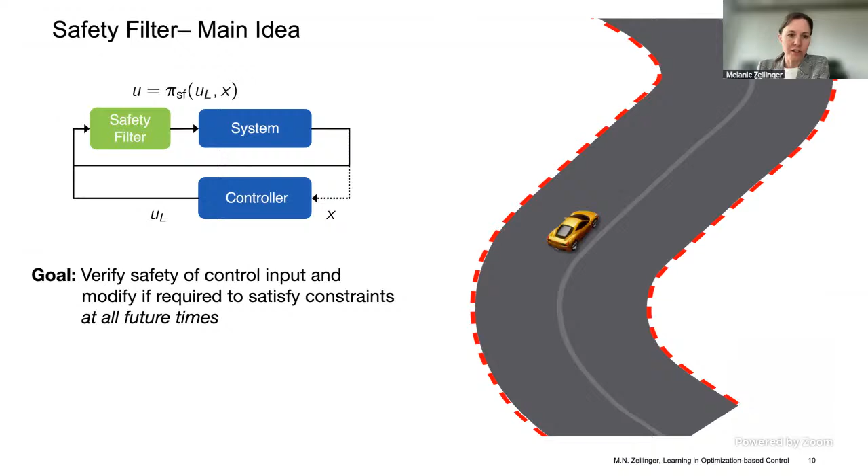We can now think about that problem building on the tools of control invariance. And this has been done, I think, mainly in 3 directions. Thinking about control invariance and computing these via reachability analysis, control barrier functions have become extremely popular. But also, now that we have seen this idea of safety as a planning problem, you can also write down a predictive safety filter. There's many more that I'm not listing here: techniques relating to reference governors, and different terms than safety filters like runtime assurance, etc. So I'm just highlighting those 3 as main categories that we've in particular thought about.

And we've tried to put them in perspective in this recent Control Systems Magazine article. And we've also given a tutorial at the L4DC last year that you can find online if you want to hear a little bit more about safety filters.

So if we now write down a predictive safety filter, we can directly take these constraints that we had before, which ensure safety from some current state. But now we're going to add our safety filter objective and say, well, we want to plan a safe trajectory, but we also ideally want to match the proposed action. And this is the same objective that we also commonly use in control barrier functions. So if I apply the optimal U0 from that problem, then I know this is always safe.

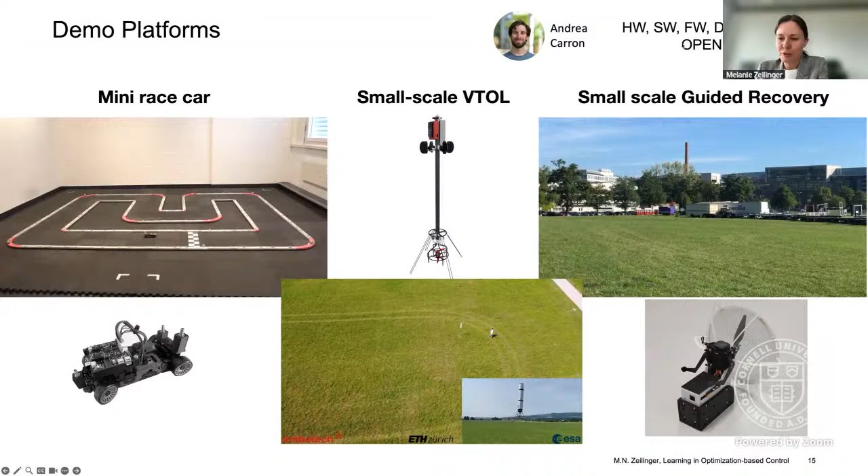We have, maybe I'll play this again, a small scale guided recovery system. So you can control the parachute to do some high precision landing. And so it's really nice to test the algorithms really early on these platforms. They're all developed by Andrea Carron in the team, and we're making everything open source. So hopefully many people can build on these systems or replicate them and build on also the software that we have been developing already.

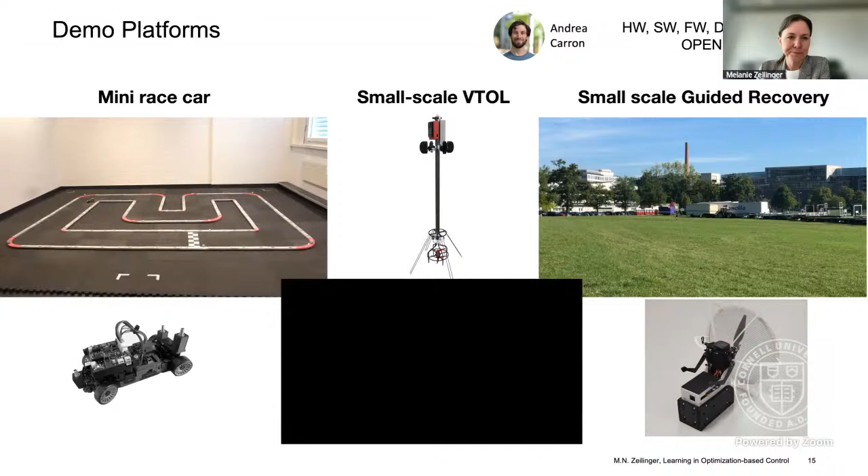And then we impose the state and input constraints on the prediction, and we use a terminal condition in the cost and in the constraints. And then, of course, we know that the standard formulation has really nice theoretical guarantees. So when we now combine this with learning, we actually have different options, and I just want to point this out. So we can build on the predictive control formulation and integrate learning, or we could also come from a reinforcement learning perspective and just use MPC as a particular policy parameterization. The way that I will talk about this is really where we build on MPC and integrate learning, but just to highlight that there are really different perspectives on this.

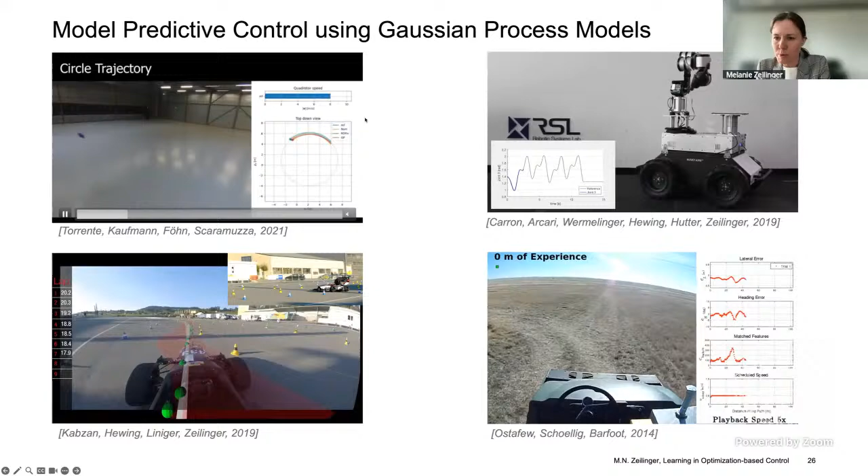Over the last years, we've seen some nice demonstrations of GP-MPC that motivate us to take this further. Of course, some older work on autonomous racing that we have done, and also some nice results on drone racing from Davide Scaramuzza's group, where we really see performance improvements, and we can account for the uncertainties, so we're nicely getting uncertainty-aware high-performance control.

So what we want to do is we want to integrate such a GP model and the predictive control formulation in order to leverage the improved prediction capabilities of such a model. But we also want to account for the uncertainty. So this makes this a stochastic problem. If I put in such a GP, I can formulate my constraints as chance constraints, also modify the cost correspondingly. But of course, this is not yet a tractable problem.

There's many challenges. One is just the uncertainty propagation going forward over the horizon, because I have to now propagate the GP through the nonlinear dynamics. Then, of course, I have to think about constraint satisfaction guarantees if I now do this in receding horizon and in closed loop. And then I have to think about the computational efficiency, but also the learning efficiency. And I want to address in particular the computational efficiency in the following, and then I'll also show one idea for a really highly efficient parametric approximation that we've done that allows us to learn efficiently.

Okay, so for the first approach, we're building on a very common linearization-based approach where we are rewriting the problem in mean and covariance dynamics using linearization. Then we can also approximate the expected cost, and this leads us into deterministic constraints. So this is all nice. We have a nonlinear program. We could go ahead and solve it.

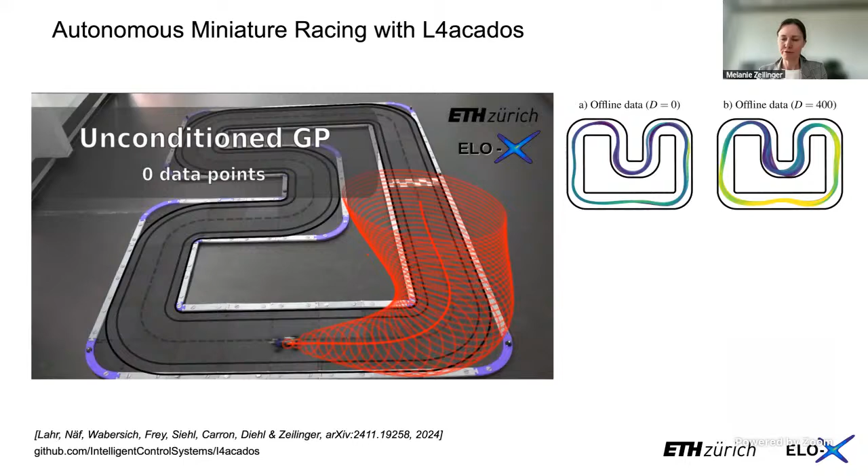Here I show this for the cars. So we have our mini cars. We have a motion capture system for the estimation, and then we're solving a model predictive contouring control problem. And what you can see here is just the GP prior, no data. We have high uncertainty, and basically we're just running very carefully along the center line to just carefully collect data.

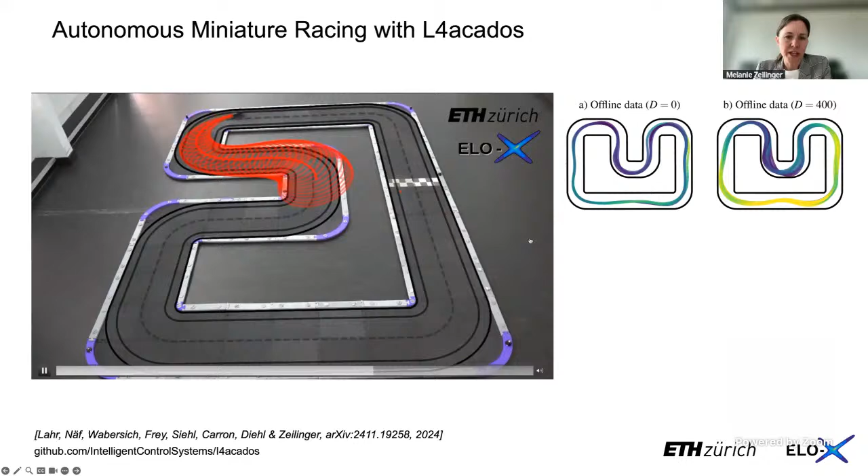Then we are taking 400 data points of those. We can run with the conditioned GP. You can see that the uncertainty is now reduced, and we're really starting to see more optimal racing behavior. Now you can also learn online. So we're now always taking 100 data points as we go along. And so over the laps you're improving and changing the performance.

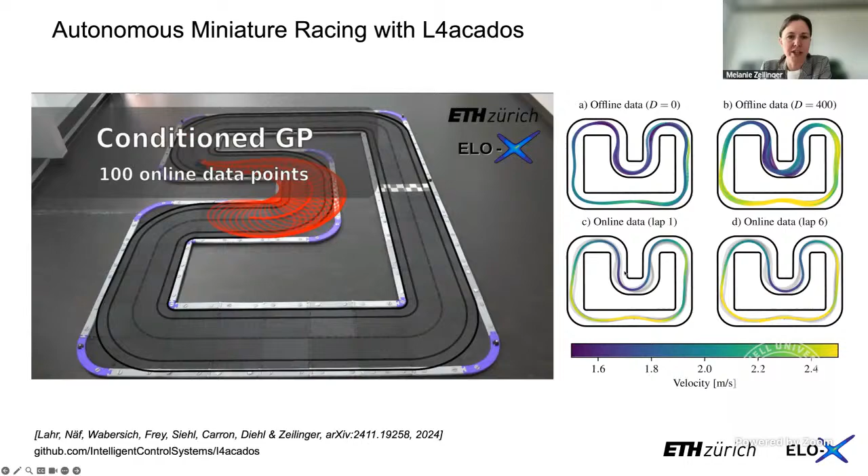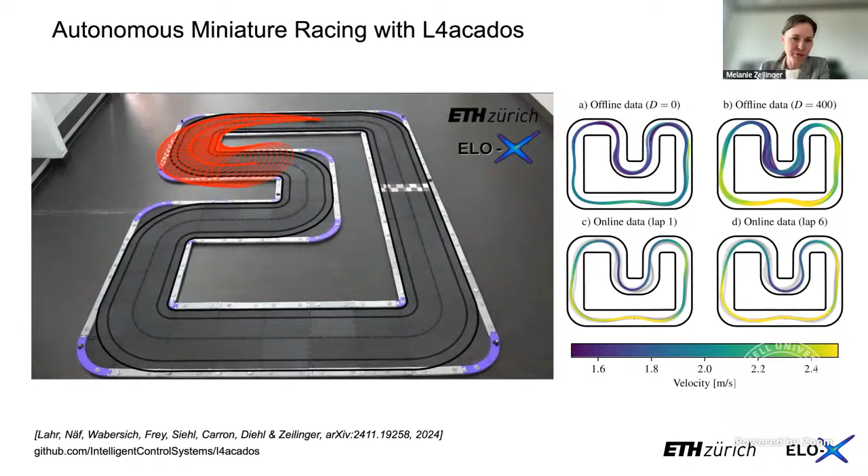Okay, so quite exciting. I think for GP MPC, we're at a point where this can be done for a complex nonlinear system in real time. So I think we've made a lot of progress on the practical side. What was nice to see is that from this result to another problem, so this is again this test vehicle at Bosch, it was really simple to do the transition.

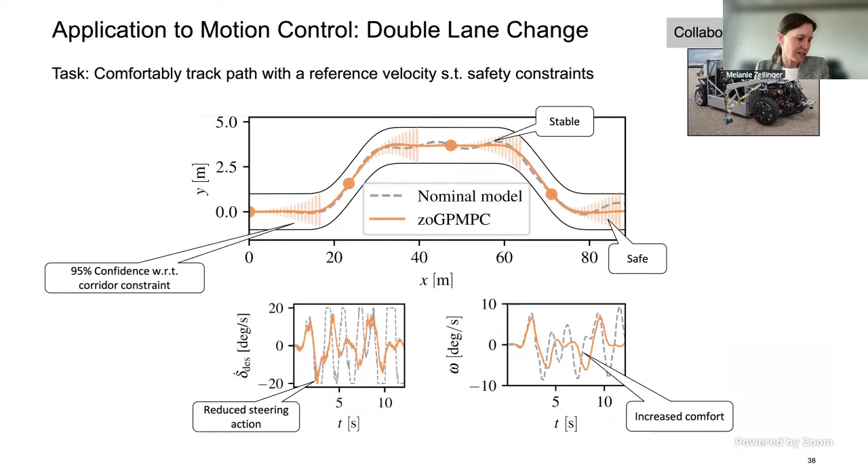So what we've done here is we wanted to show that the dynamics improvement when we do GP learning helps us improve the performance in a lane change maneuver, where previously it was seen that the poor MPC prediction actually led to uncomfortable behavior, a lot of steering action and a sort of oscillation. And with the improved GP model, it was very nice and smooth and really had increased comfort. And so it was very easy now with this toolbox and what we had developed to go into this different application. Okay, so great progress on the practical side.

But of course, I think we're not done with GP MPC. There's lots to do, and this brings me back to the trade-offs between theory, guarantees, computation, and performance. So I think we have methods on both ends. So this was what I presented. We work with the linearization, very nice practical results, efficient computation, but they can actually under-approximate the uncertainty and so be too optimistic.

So it's difficult to give rigorous guarantees for this formulation. We've seen methods on the other end where we get really nice guarantees by over-approximating the reachable sets in an ellipsoidal manner. But this is often really too conservative for practical purposes. So there's lots of room to think about better trade-offs on these different axes. And of course, lots of people are working on this.

We have recently added one more point in the middle that I'd like to point out. And this is by sampling the GP now within the sequential quadratic programming approach. What this leads to is that we get really good approximations of the reachable set forward, so much, much tighter sets. Of course, the drawback is that it's currently still rather computationally complex.

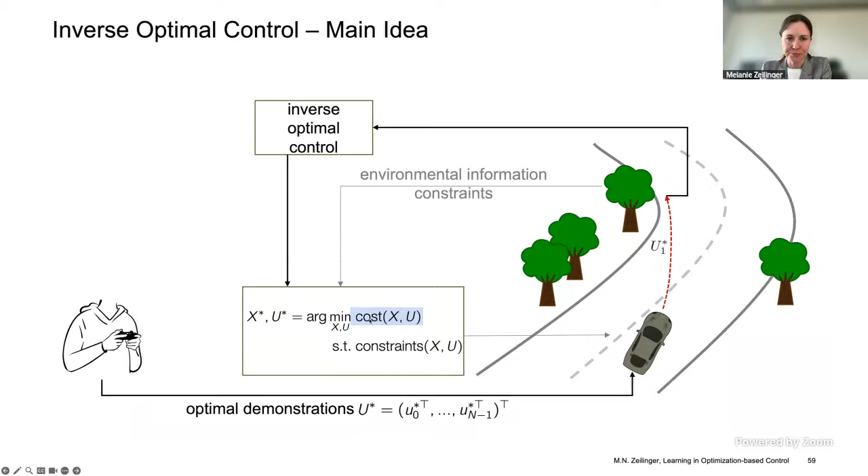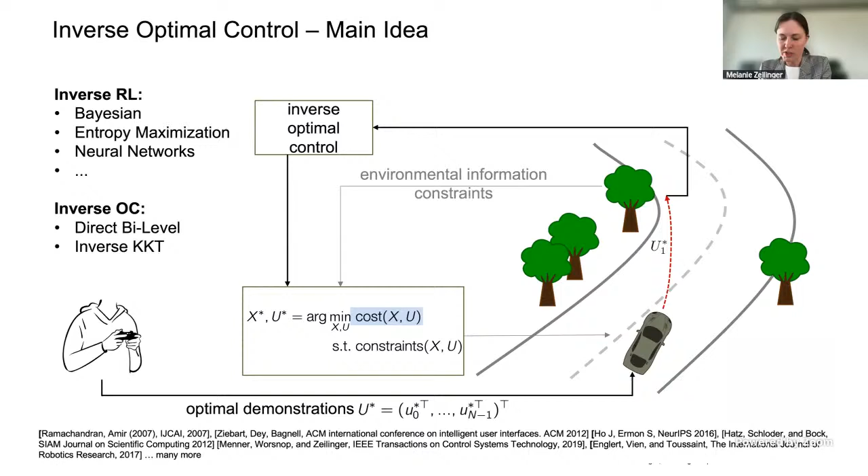Of course, inverse optimal control is not the only direction. This is also addressed in inverse RL. And both have various different methods that have been proposed. I think there's a clear difference between the two directions. Inverse RL is extremely nice because it allows us to naturally consider suboptimality, so suboptimal demonstrations, because it builds on an MDP setting. Whereas inverse optimal control is naturally suited to think about constraints.

And so when we have demonstrations that were generated in a constrained environment, that allows us to take that additional information into account. And the idea is that this leads to better estimates. While, of course, you can also approach this from the inverse RL side, what I want to show you is that we can try and approach this from the inverse optimal control side. So we want to extend the methods that we have to deal with noisy or suboptimal demonstrations.

And so for this, let me just briefly tell you how inverse optimal control works. It builds on the optimality conditions, the KKT conditions, that are necessary under suitable assumptions. So we can write down stationarity, complementary slackness, primal and dual feasibility, and we'll for now assume that my demonstrations at least are primal feasible. So this is usually satisfied.

So now I can actually solve this system of equations given an optimal demonstration x star and u star. So I can solve for the dual Lagrange multipliers. And if I propose a parametric form of my objective function that I don't know, I can also solve for theta, the parameter. So that's quite nice. But of course, if I now put in a suboptimal demonstration, any one of those optimality conditions can actually be violated.

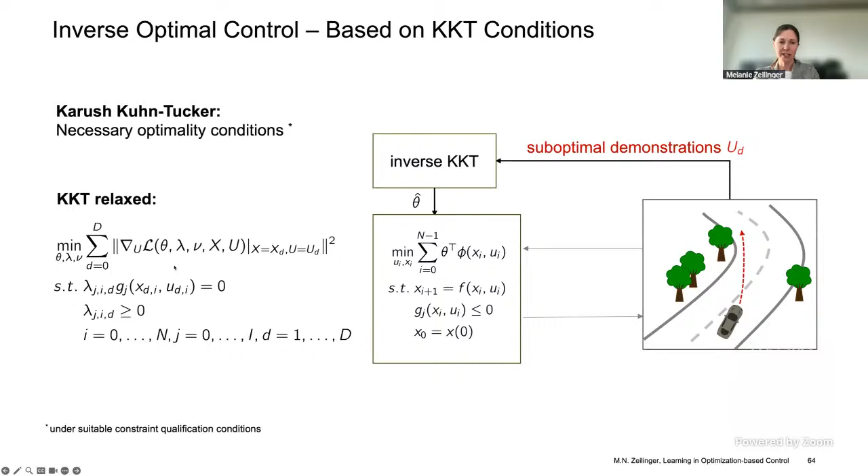The way that this had been addressed in the literature is that we relax the stationarity condition. So we keep dual feasibility and complementary slackness. We assume primal feasibility is given, and then we relax the stationarity condition and take the least squares approximation. However, this is actually an inconsistent estimator if we have a noisy demonstration.

Let's say if I have a noisy demonstration, there exists an optimal demonstration plus some noise, then this can be seen by rewriting our stationarity condition as a regression problem. So here we have a Jacobian, which will be a function of the input sequence. Here's our parameters that we're optimizing for, and this should equal some output, which in this case is 0.

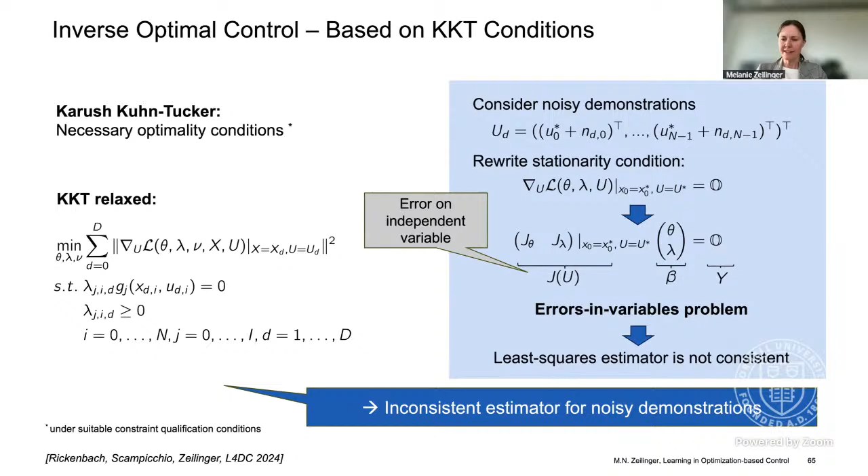But in this case, we actually have an error on u, which is the independent variable, and not on y. So actually, this is an errors-in-variables problem, and so a least squares estimator is not consistent. So this was a nice realization, and we then just started using regression techniques from errors-in-variables regression.

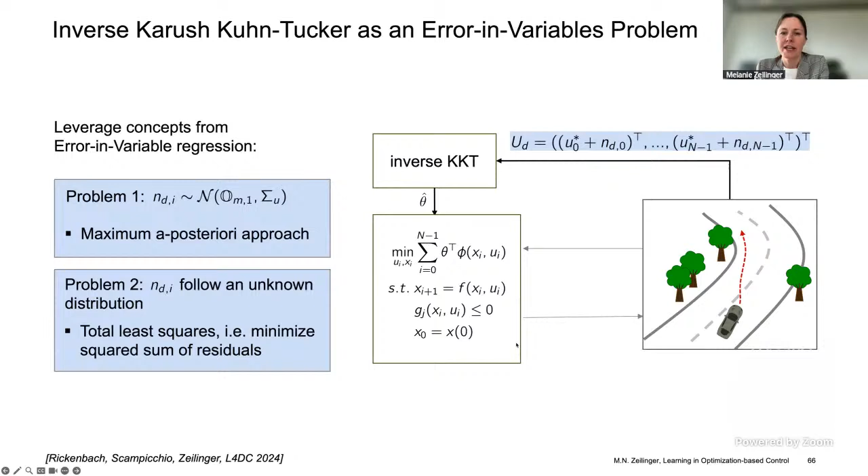We've tested two different directions: one where we assume the noise is Gaussian, so we can solve sort of a maximum a posteriori problem, and one where we say we don't know anything about which distribution this is, and then we can write this as a total least squares problem. And what we saw is that for different simulation settings, a linear spring damper system, kinematic bicycle model, a Bayesian glucose model, we get significantly reduced estimation errors by writing this as an errors-in-variables regression problem compared with the least squares relaxation.

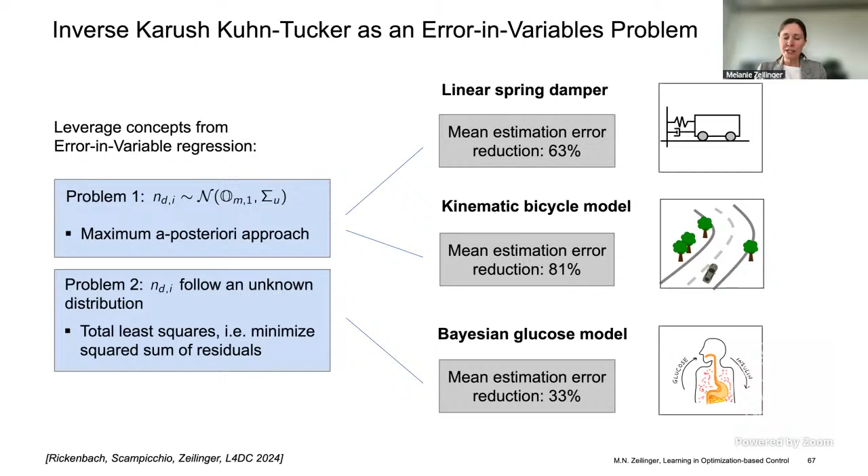So that's quite motivating. These techniques give us consistent estimators under certain assumptions. We can reflect the quality of the estimate. But of course, there's a big drawback, and this is that we have the remaining KKT conditions in the constraints. So it is a difficult optimization problem to solve. It's a problem with complementarity constraints, and that's, of course, not easy to solve.

Nevertheless, we're continuing to think along this direction, but we've also taken a second track that is maybe a little bit more practical, where we go back and think about the original relaxation, and if that's actually the right way to formulate the problem. And we've come up with a different relaxation that is based on a soft constraint formulation, which gives us a very nice way to penalize constraint violation. So this is coming up soon, so stay tuned. Hopefully we'll put the paper out soon.

Okay, so that brings me to the end of my talk. What I was hoping to show you is different flavors of how we can combine learning and optimization-based control. First, we started just by defining safety, and we did this by defining it as a forward planning problem. So we can plan a backup trajectory, and that gives us a safety certificate. It's a very general idea. Then we talked specifically about Gaussian processes and how we integrate them in predictive control, and I've shown you a tailored optimizer that you can all use.

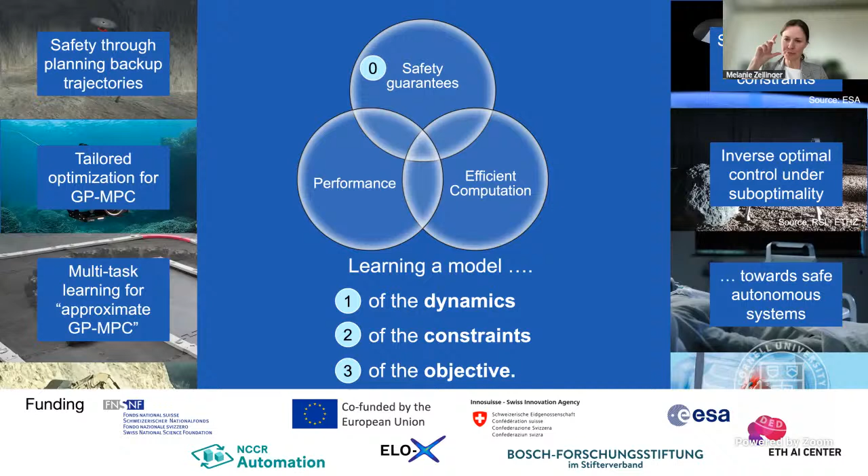And then for the efficiency with different learning models, when you're running SQP, your model information is really coming in through the sensitivities. And so you can nicely interface your iterative optimizer by just feeding it the right sensitivities at every iteration from your model, and that formulation then allows you to use the efficiency on both sides. So I think it's both: it's a good interface, and it's an efficient optimizer that goes through approximate iterations.